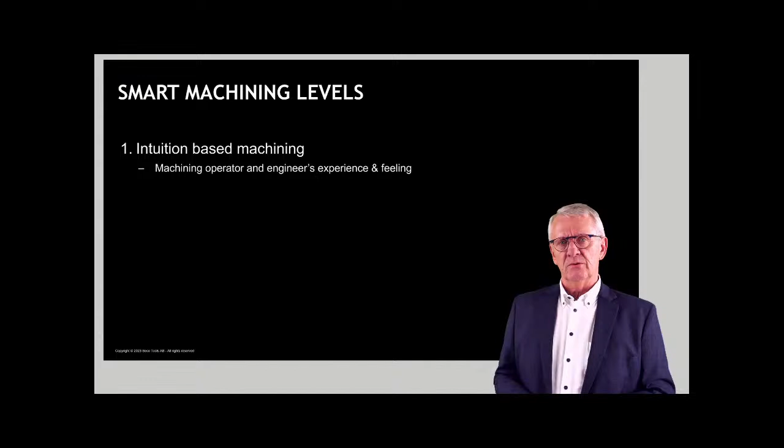To put things in perspective first, if we talk about model-based machining, what do we mean? Let me try to formulate a number of things which are important to understand where we are. If we talk about machining, about the basis on which we select cutting tools, machining methods, cutting conditions, and handle issues and problems - for a long time we talked about what we could call intuition-based machining. Intuition-based machining is where we base our choices, our selections, on intuition, on feeling, on experience, on expertise. It's the traditional way, how we did it for a lot of years. More recently, let's say over the past couple of years, we tried to make a jump, and I think we were rather successful in making a jump towards model-based machining.

Model-based machining is where we use models - and may I remind you that a model is not a theory. A model is a description of something. A model describes reality, hopefully in the best possible way. Model-based machining is where we use physical models that describe machining processes, that give us insight into what's going on, and based on those models we make our selections, our choices. We select cutting tools, cutting conditions, and so on and so forth.

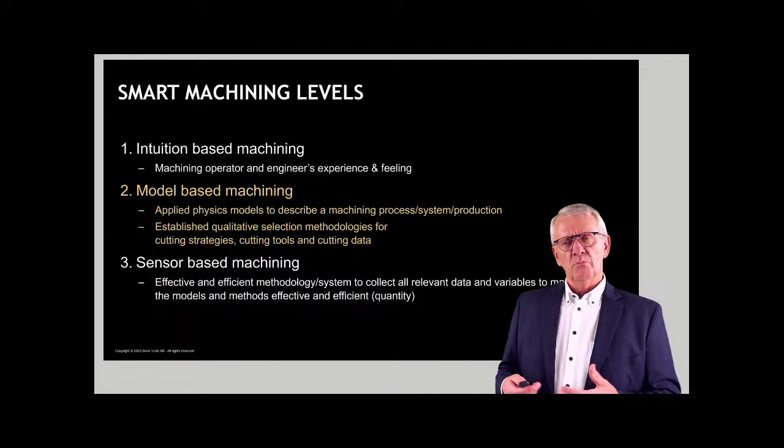That's model-based machining, and I have a feeling that in general, in the world today of machining, that's where we are. On the one hand we still have intuition-based machining. We made a jump towards model-based machining, but to truly and fully exploit all the possibilities of model-based machining, there is a step we need to take, and that I call sensor-based machining. Sensor-based machining is where we collect a big number of data that we can use to fill up the models we have been creating, so that the models can be used in the most effective way. So model-based machining is only really usable when combined with sensor-based machining.

The end is what we all talk about, what everybody is discussing: digital, data-driven machining. One could say, okay, if I take my models and the data I collected through measuring, and put that in a digital environment, then I reach a level of digital data-driven machining.

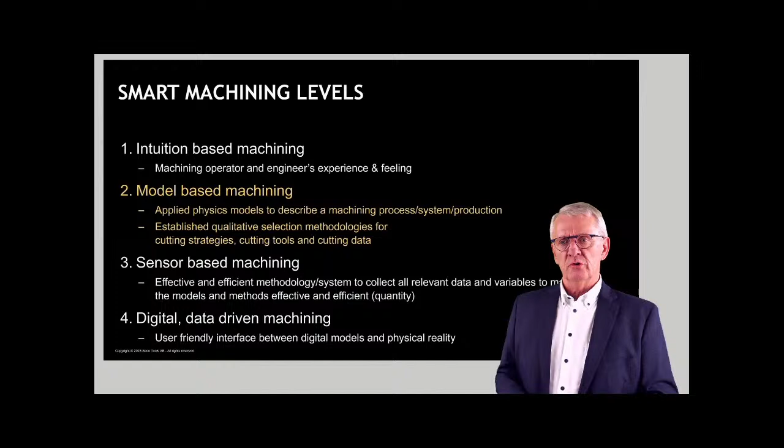Today, we are going to talk about cutting forces, the mechanics of machining, and the models we use in machining for that. And we will see here and there, as we describe the models, that there is a need for sensor-based situations also.

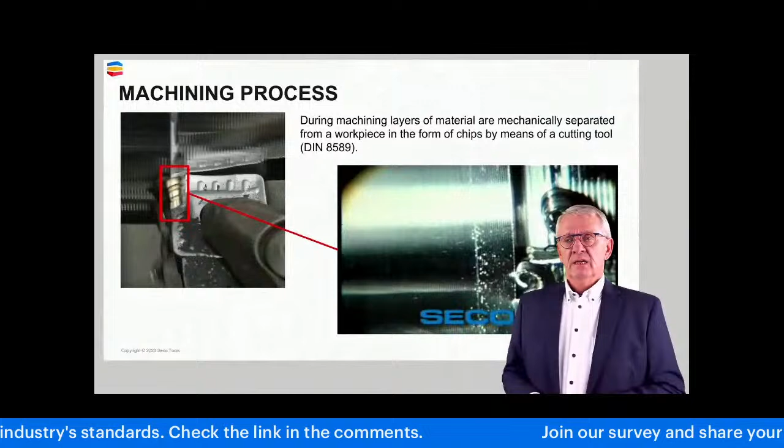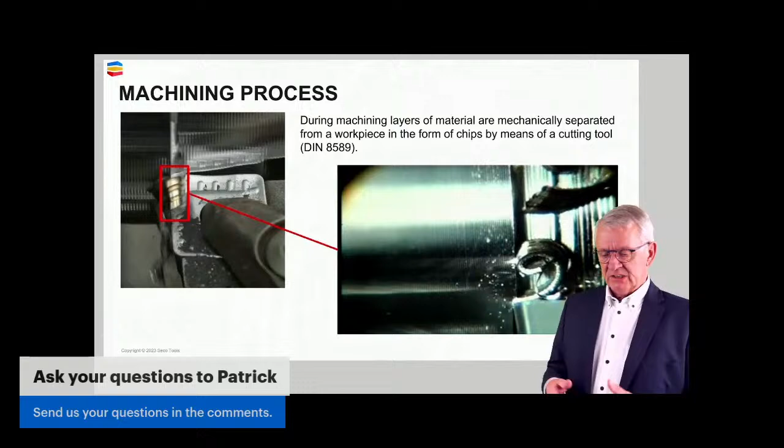Now, model-based machining - the basic model when we talk about machining is a model describing a machining process. Machining is a process where we have a cutting tool that we push through workpiece material, and we deform the workpiece material so much that the material is shorn off, and the shorn off material is evacuated in the form of chips. That's the overall, general, fundamental model we use to describe a machining process.

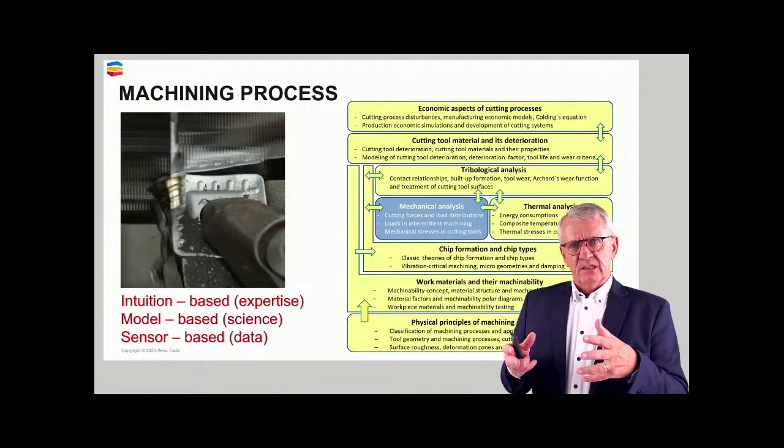Now, if we look at that as a model, there are quite a lot of phenomena we have to take into consideration. There is the mechanical side, the thermal side, the tribological side, and so on, and they all kind of link together in one way or another. But today I want to focus with you on the mechanical side, the mechanics of machining. And if we look at machining, shown in a slightly different way, machining as a process is kind of a balance exercise.

You have on the one hand the cutting tool you use and the support of the cutting tool, meaning the machine tool and so on. That cutting tool has a certain ability to carry loads. On the other hand, the machining process puts the tool in a situation where certain loads are going to act on the cutting tool.

We need to find a balance. We want a well-balanced process so that the load-bearing capacity of the tool and the loads acting on the tool during the process are in balance. Because if there's no balance, there is trouble in paradise. You have to have that balance, both technical and economical.

Today we concentrate mainly on the technical side, and if we want to describe the balance, we need to talk about mechanics again. There are forces acting during this process, thermal effects, tribological effects, chemical effects, and so on. Today, as I already said, we focus on the mechanical part of it.

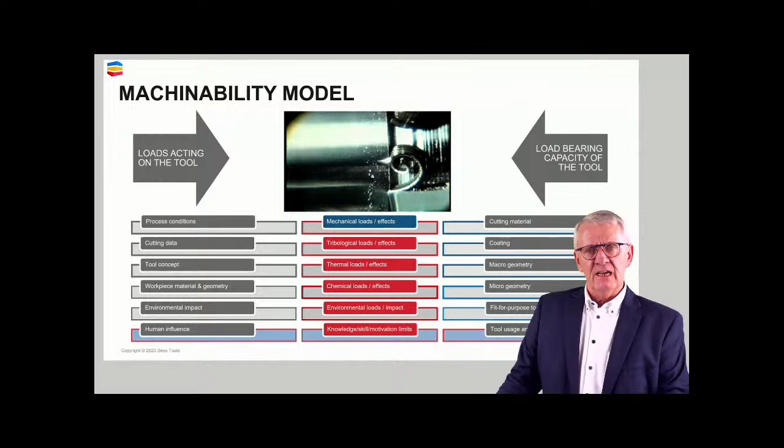If you solve the equation here, taking all the variables that influence the loads acting on a tool and combining that with all the elements that give a tool the possibility to carry load, and you try to solve the equation and bring balance, you want to know if you did a good exercise. You want to control, to see, okay, what I did, is that good now? Did I create what I wanted to create, a well-balanced machining process?

And for that, here I'm going to touch slightly on sensor-based machining, because to find out if you solved the equation right, there are two sources of information for you. One source is the people around the process. People being perhaps the most crucial thing still today in a production shop where we want to reach the highest possible manufacturing excellence levels.

People have a feeling for it. You remember intuition-based machining, they feel things. Was this good? Was this not so good? Was there balance? Was there unbalance? A source for you is to ask people. Ask them, how was it with the process? How did it go? What did you observe?

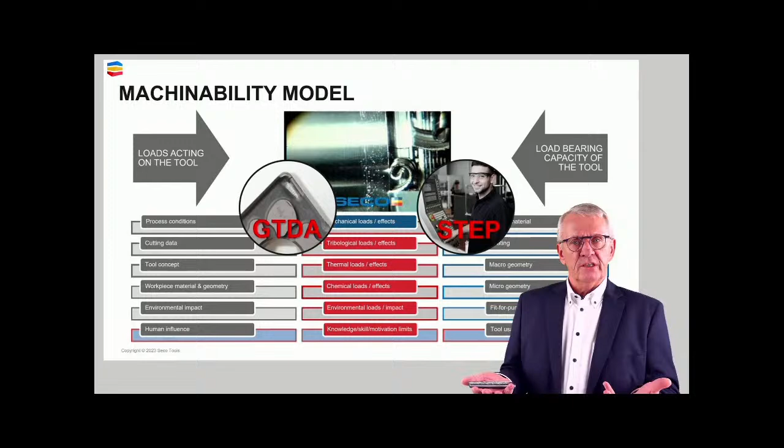Another source of information, a little bit less subjective, because if you ask people it's always a bit subjective, is the tools which have been used in the process. Look at the tools, and what you see on the cutting edges, on the cutting tools, is going to tell you a story - how it was during operation.

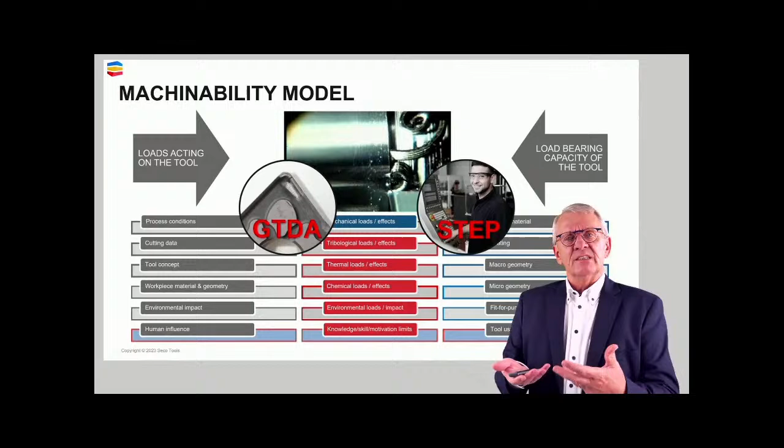If you look at tools in a structured way, there are systems and concepts for that. The one we work quite a lot with is what we call GTDA, Global Tool Deterioration Analysis, where in a standardized way we evaluate tools after they have been used and see what we can learn from it to do better next time.

Now, as we are talking about the mechanics of machining, very quickly a few definitions. What is a force? Here I talk very general mechanics - this has nothing to do with machining in the first place. A force is defined as any influence that can change the position, speed, or state of an object. That's the physical definition of a force.

In case of machining, we want to change the state of a workpiece. We want to deform the material, we want to shear it off. That means we have to apply a cutting force to achieve that.

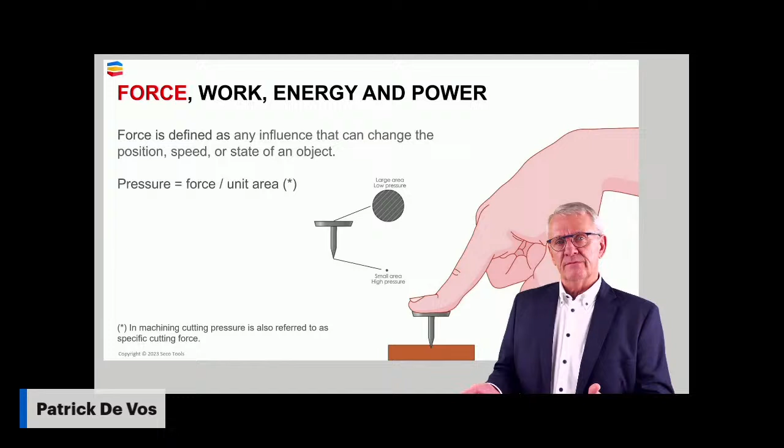When we talk about forces, around the corner is also pressure. Pressure is a force per unit area. It's the same, yet it's not the same - it's connected to each other. But you have a force, and you have a force per unit surface, which is called the pressure.

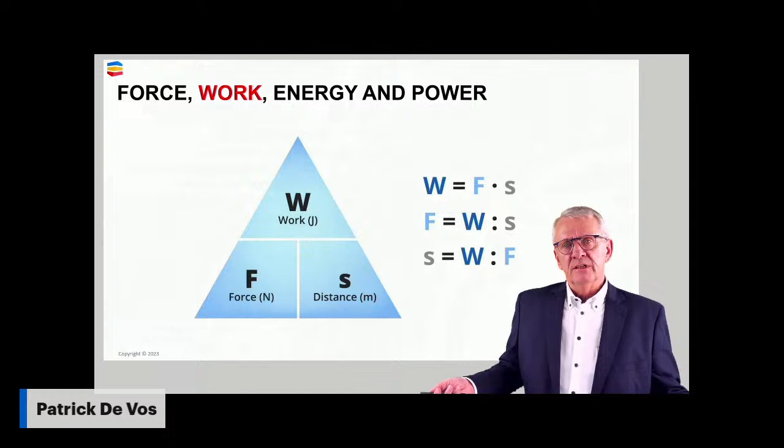Work, another thing we use in mechanics, is force multiplied by distance. If you apply a force on an object and move it over a certain distance, work has been done. That's the definition of work. And to be able to apply a force big enough to move an object over a certain distance, you need energy.

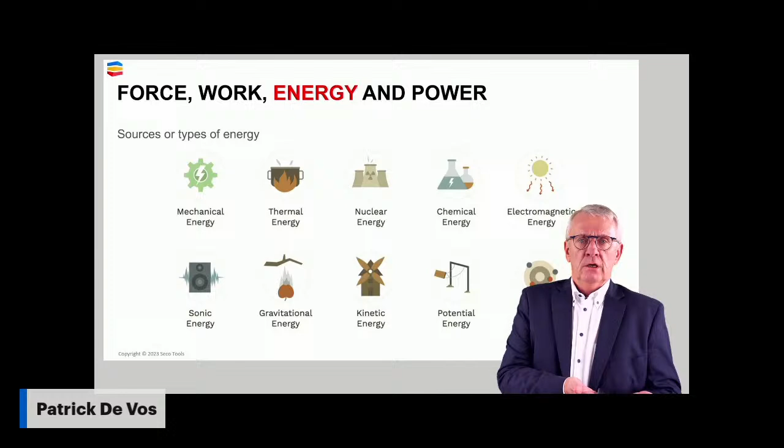The source of energy can be multiple - that's not the discussion point here. But to do machining, we need a force. As the tool is moving through a workpiece, work has been done. And to be able to do work, we need energy. We refer to it as the cutting energy, the energy needed to cut.

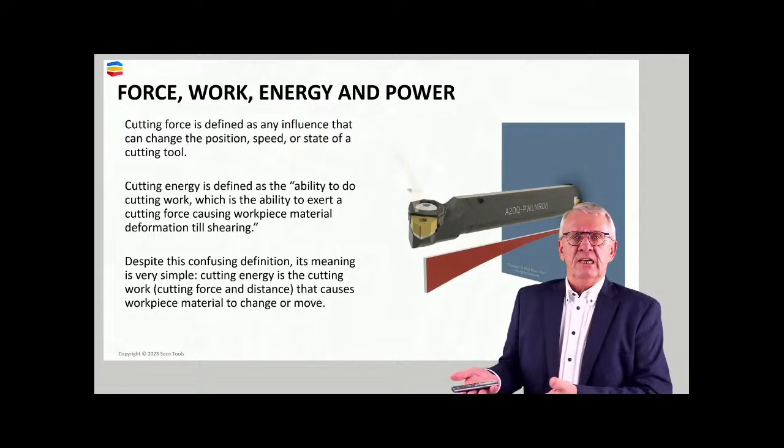So a cutting force - before, the words force, work, energy, power, which is work per time unit, were general. If you put 'cutting' in front, you are fully into metal cutting. You have a cutting force, cutting work, cutting energy, and cutting power.

Bear in mind that in the mechanical world, we always have action and reaction. The tool is going to put a force on a workpiece to deform the workpiece material, but the workpiece is going to push back. You have action and reaction. Never forget that. Later on, when we talk about vibrations, for instance, it's important to realize that a tool is vibrating because a workpiece is pushing back to the tool.

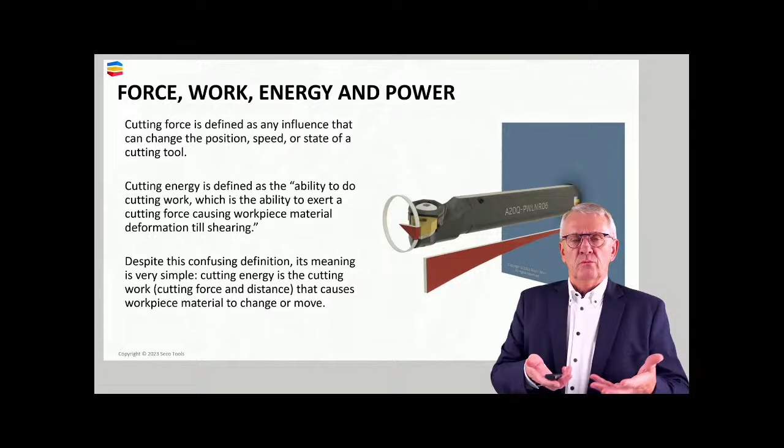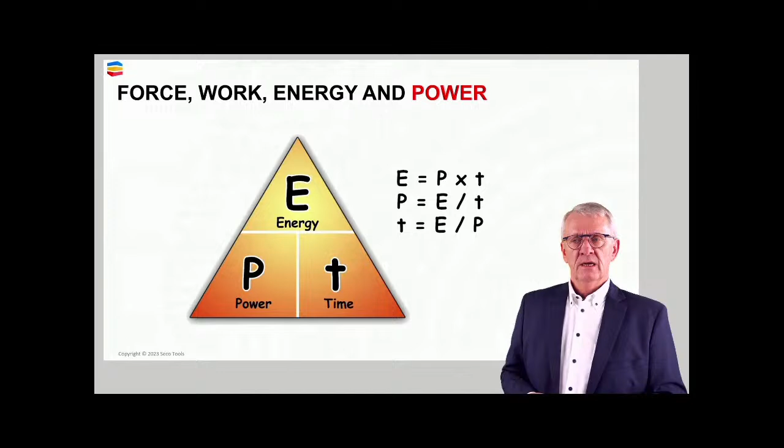Power, as I already said, is energy per time unit. It's kind of concentrated energy. Those are the basic definitions we are going to use throughout this presentation: force, work, energy, power.

That tool is moving through workpiece material, deforming the material in a so-called shear plane. And to overcome the strength of the material, in that shear plane acts a shear force. The deformed material, under the form of a chip, is gliding over the cutting tool, over the rake face. There is going to be a friction force there. And based on those two forces, the shear force and the friction force, Ernst and Merchant developed a whole way of thinking on how cutting forces develop during machining.

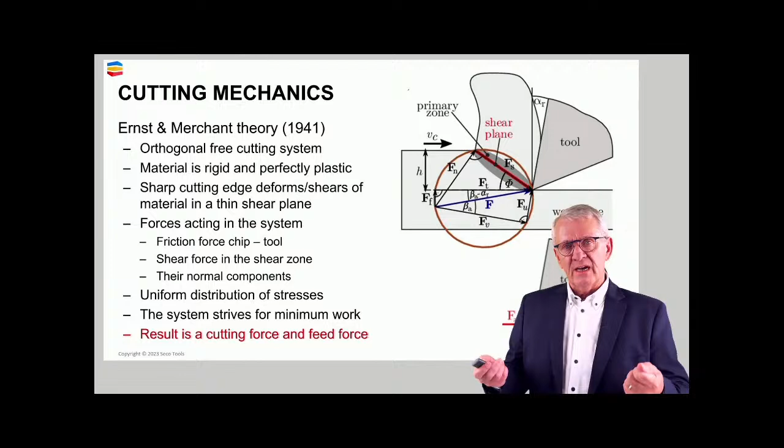So I have a cutting tool. To make it cut, I need to apply a cutting force and a feed force. And that kind of macro modeling, which we still use today, is based on Ernst and Merchant, and be careful, also based on so-called oblique cutting.

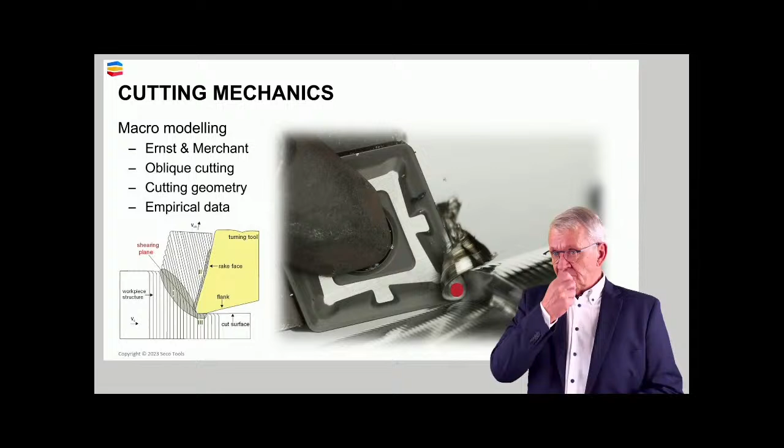Oblique cutting is a situation where a cutting edge is perpendicular to the feed direction. So we have to bear in mind later on, if we talk about these things, the macro modeling also somehow has to take into consideration a certain cutting geometry we use.

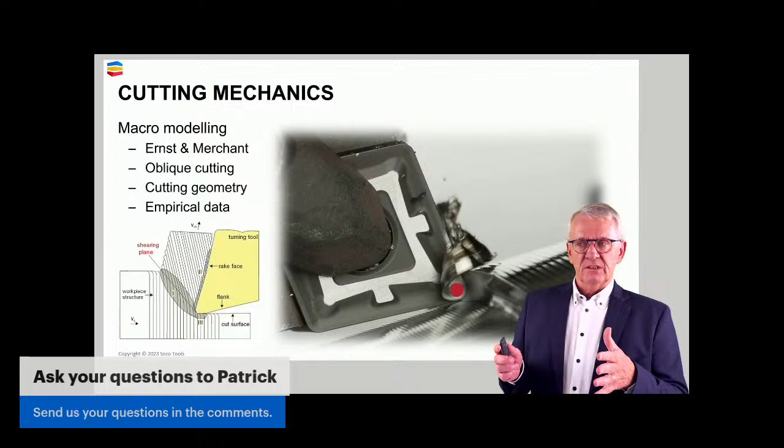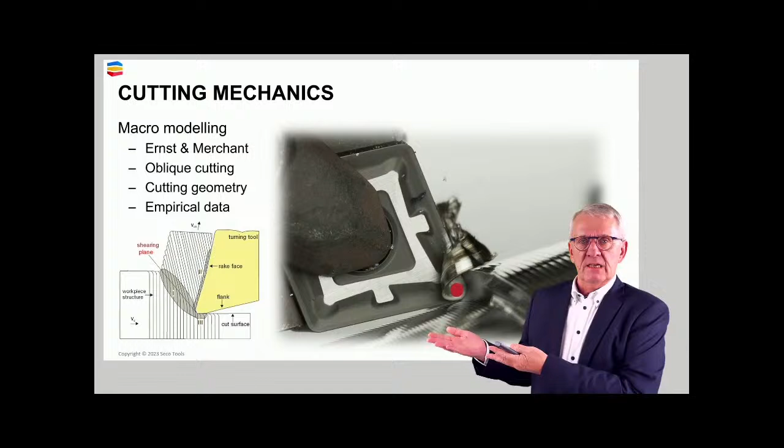And, very important, most of the things we say further about this way of working, this model we are going to try to develop together, is based on empirical data. In other words, what I called a couple of minutes ago, sensor-based machining—machining based on data. And that's an interesting thing, because it means the models were created based on data, and once we have the models, we need more data to make the models better, which makes a very nice closed loop to this.

Ernst and Merchant said there is a feed force and a cutting force, perpendicular to each other. The feed force is acting in the direction of the feed movement of the tool, while the cutting force is acting in the cutting direction of the tool.

What we see in reality is, because real cutting is not really only oblique cutting, but we also use cutting where the cutting edge angles are not 90 degrees, that there is kind of a reactive force which we refer to as the passive force, the passive component. Why do we call it passive? Well, very simple—because there is normally no movement in that direction, and as there is no movement, there is no work and there is no energy needed for that force.

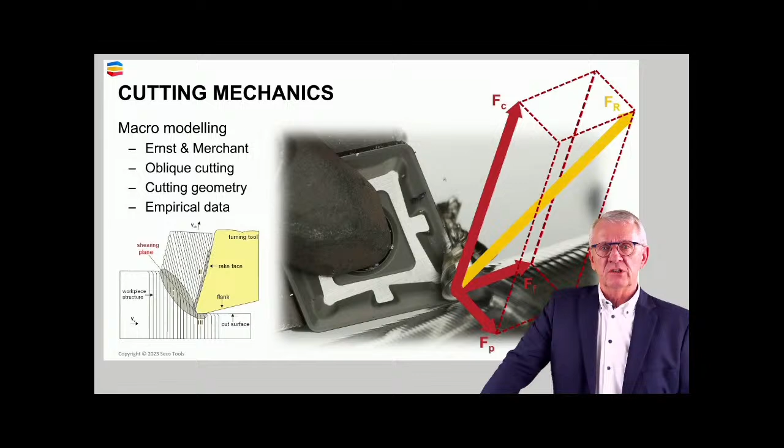But there is something else I'm going to come back to later on for that cutting force. The real cutting force, the physical cutting force working during machining, is the yellow one. It's the three components added together, and that gives us the real cutting force—the cutting force we would measure if we measured actual cutting forces in reality.

Now, that cutting force is influenced by workpiece materials, as we're going to see directly, and is influenced by the cutting geometry. The workpiece materials—I think you can understand that. It's about: the harder the workpiece material, the more difficult to deform. And I want to deform it, because that's machining. So harder workpiece materials demand higher cutting forces to be machined.

The cutting geometry: sharper tools cut easier than less sharp tools. And cutting data and conditions, obviously—if you increase your cutting data, you need to push harder against more workpiece material, for instance because you increase your depth of cut, to do actual machining.

Cutting forces, that they exist, and remember, as the picture shows, it's always action and reaction. For me, it's the same what you take as a basis - is it a cutting tool pushing against a workpiece, or is it a workpiece pushing back against a cutting tool? Whatever, the two are there.

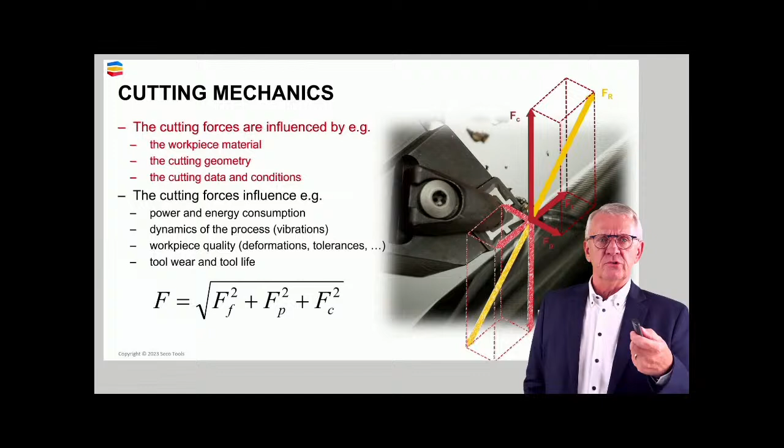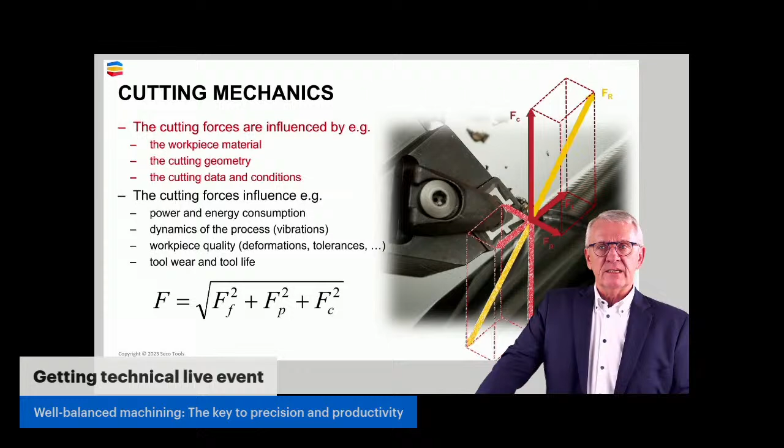Later on, we are going to see - first I want to determine what the variables are and how they impact on a cutting force, the red part here. Later we are going to focus on what is still the black text: what are the consequences of the existence of cutting forces? What do we have to bear in mind?

Now, if we talk about cutting forces, we have to be a little bit careful when we refer to cutting data. Because cutting data - automatically people will say, yeah, cutting data, of course there's the depth of cut, the feed and the cutting speed.

Those we normally refer to as the technical cutting data. It's the cutting data which are used in the workshop, which are used by programmers. A tool needs to be used with a feed, a depth of cut and a cutting speed. Those things are relevant for the workpiece.

Technological cutting data, however, which are slightly different defined, are relevant for the functioning of the cutting edge. Physical cutting data are very closely related to technological cutting data, but the difference is the scale on which you look at things. Physical cutting data are relevant for the physics of the machining process, but for the sake of simplicity here, technological and physical cutting data we consider the same thing.

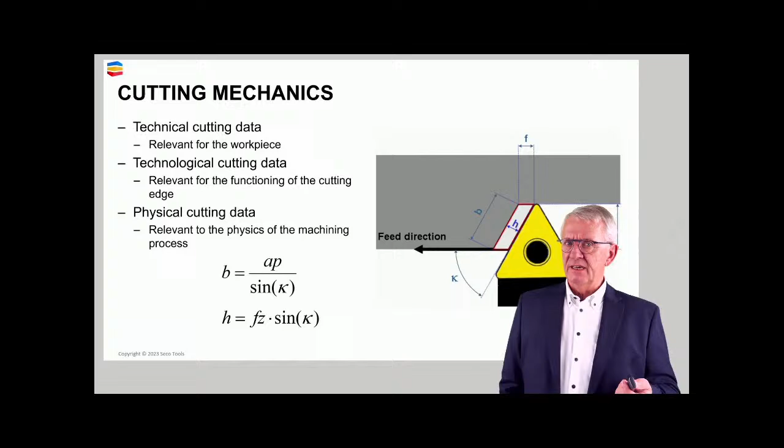The model we are developing here refers to, or is originally made up for, width of cut and chip thickness. So there we have to be a little bit careful when we apply it.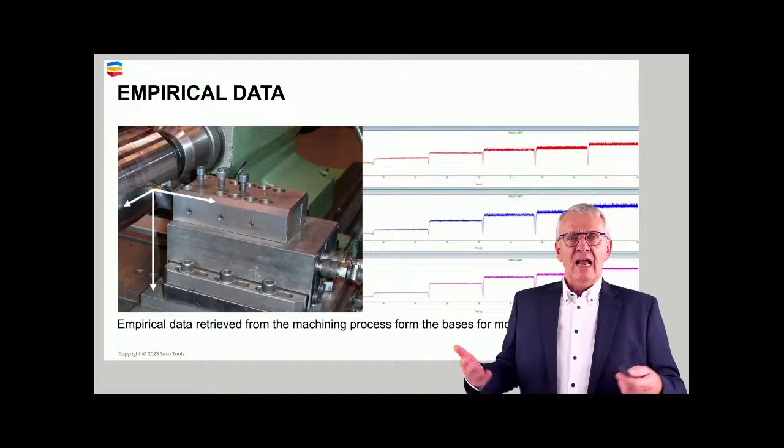The model is based on, as I already said, empirical data. We measure and we see what we observe. And measuring, what I mean is, we take a cutting process, we take a measuring tool to measure cutting forces, in this case cutting forces, and we measure the three components. And we start to play with variables - different materials, different feeds, different depth of cut, different tools - and we document what we measure. That's the basis.

And the first gentleman who did that in a structured way was a certain Mr. Kienzle in Germany. I'm talking about the beginning of the 50s of the previous century. And he measured hundreds, thousands, tens of thousands of situations, always measuring cutting forces. He started a little bit of big data analysis avant la lettre in the 50s already.

He looked at the data and tried to find out, what do I see? Do I see something in all this data? And he did - he saw that for a certain tool... sorry for this, but I have a big cold, you know.

For a certain tool in a certain workpiece material, if he started to play with cutting conditions and measured the three cutting forces, what he noticed was the diagram up right here. If he increased the depth of cut while keeping cutting speed and feed constant, he noticed a relation between depth of cut and cutting forces that is rather simple and linear. If he increases depth of cut, the cutting forces increase in the same relation, in case of steel, since that was his basic test material.

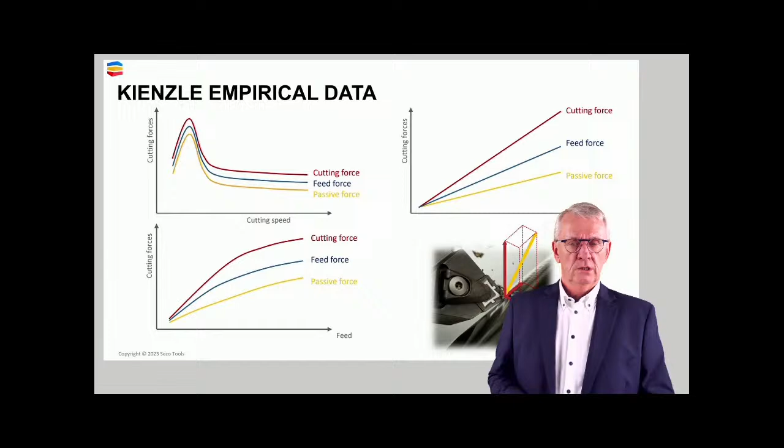If your cutting speed is too low, you have a very specific phenomenon during machining which we refer to as build-up edge, due to adhesion between workpiece material and cutting material. If due to that adhesion a build-up edge is formed, some of the workpiece material sticks on the cutting edge, and one consequence of that is that your cutting forces go up. If, however, you increase your cutting speed, that phenomenon disappears and your cutting forces go down to normal levels. So this bulb is an indication that you're using cutting speeds that are too low. That's all there is to this story.

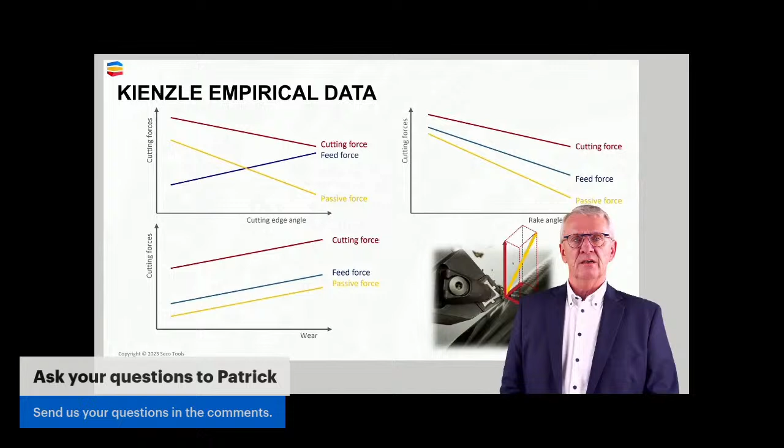Further, as I said, Kienzle did tens of thousands of tests. He also evaluated the effect of geometries, shown in the two top graphs. To the left is the cutting edge angle, to the right is the rake angle. Basically, these diagrams tell us the sharper the tool, the lower the cutting forces, which makes sense.

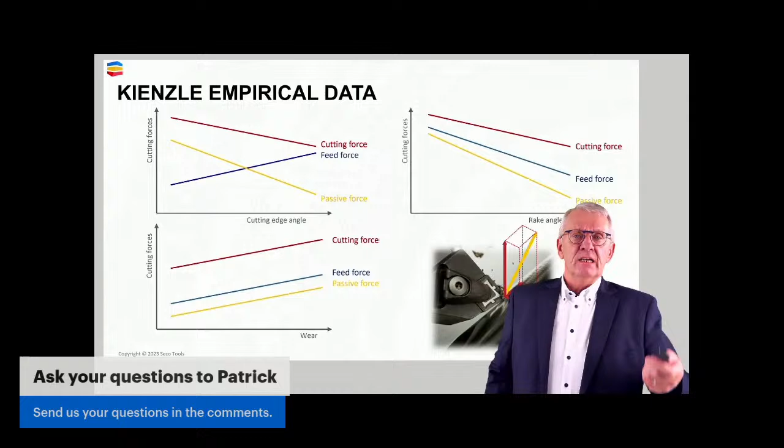He also, of course, looked into the influence of wear on a cutting tool, because after a while a cutting tool wears out, and certain wear patterns develop on the cutting edge that change the geometry of the tool, and that has consequences. In general, the picture is that as wear increases, cutting forces go up. As the wear increases, the tool loses its original geometry, the geometry for which it was designed, and that impacts how the tool functions in a negative manner. The cutting forces go up.

Basically, what Kienzle concluded was that if you have a tool and a workpiece material, the highest impact, besides working conditions like wear and so on, comes from cutting data, mainly the feed and the depth of cut, as you see unified here in one diagram.

And the impact of the depth of cut, horizontally considered depth of cut. If you look to the blue line, that is the relation between depth of cut and cutting force, and you see it's a linear relation. Every change you make in depth of cut, you find back in cutting force changes.

The red line represents the impact of the feed, and there you see that the impact is lower. The bigger the feed, the bigger the difference gets between impact from depth of cut and impact from feed.

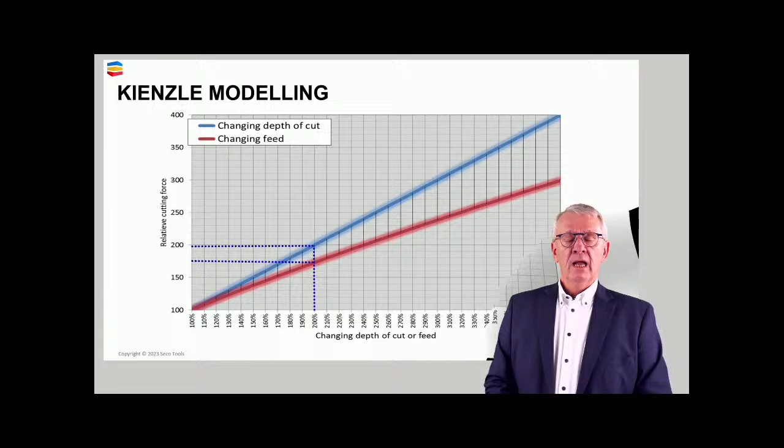Of course, those were the observations. Kienzle spent quite some time formulating this in a certain manner so we could work with it, which led to formulas, mathematics, calculus, where Kienzle says, depending on if you focus on the cutting force or the feed force or whatever, that the certain force component is influenced by the cutting conditions: width of cut, depth of cut,

and chip thickness, feed. To some extent, you have to take into consideration the geometry, and you have the material impact. The material impact is represented here by the K11 values: KC11, KF11, and KP11, which refer to cutting force component, feed force component, and passive force component. Here there is some confusion: some call it a specific cutting force, others call it a specific cutting pressure, as it is a pressure, one could say.

1,1 would be the cutting force you measure if the depth of cut is 1 millimeter and the feed is 1 millimeter. That's KC11. It's a material constant. Every material has a certain density, a certain specific cutting force, a certain strength, a certain hardness, and so on.

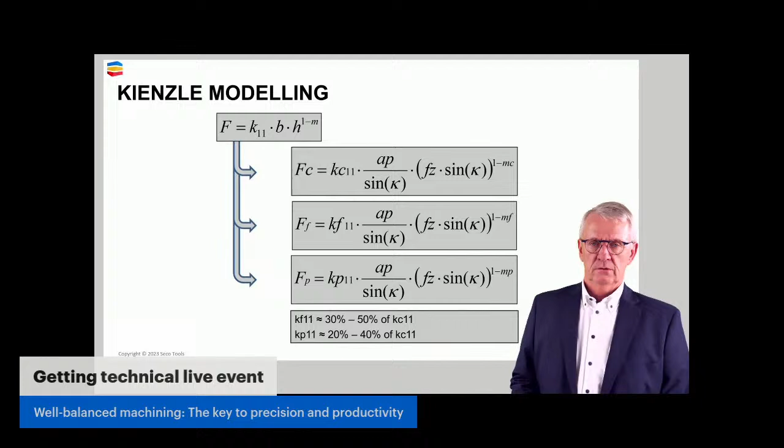That's the material impact. The 1 minus mc is the exponent, which is a mathematical way of saying that the impact of the feed, or the relation between the feed and the cutting force, is nonlinear. Those are the mathematics related to this process.

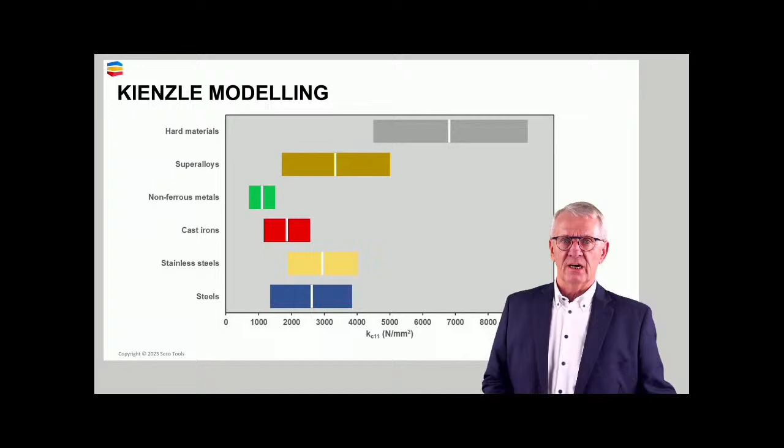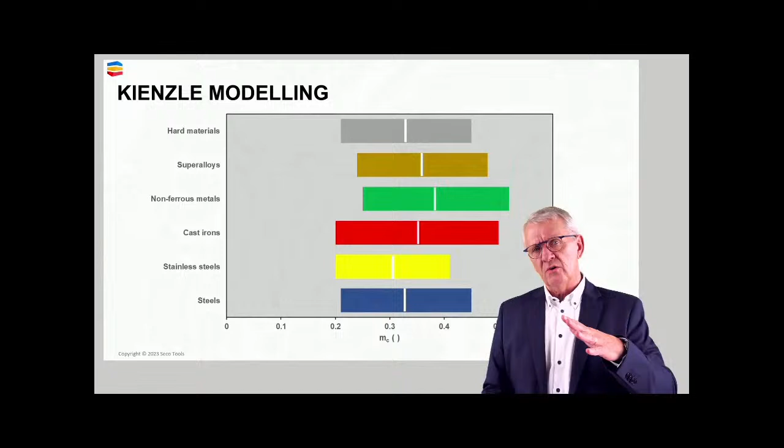MC - to which extent is the relation linear, or is approaching linear, or is going away from linear? The more the MC goes towards higher values, the lesser linearity you see in the relation. The lower, the more linearity you see in the relation.

Here again you have the 6 typical workpiece materials, and you see the differences are not so big, but be careful, because these are exponents and could lead to quite big differences when you start to put values in the equation.

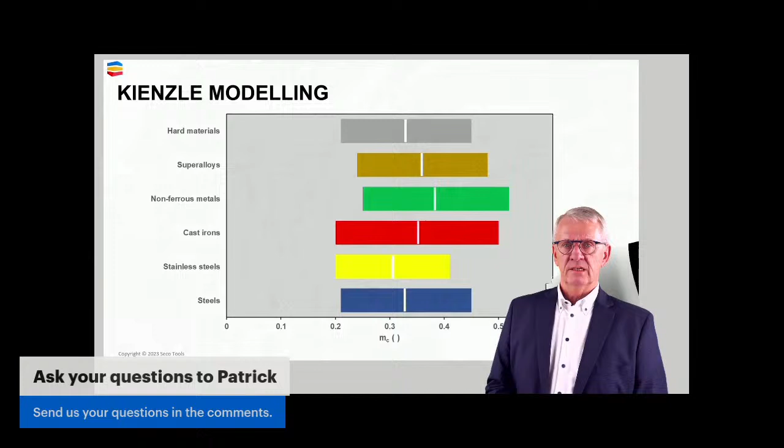What it means is, and hopefully this diagram shows it a little bit better - again you see the colors: green non-ferro, red cast iron, blue and yellow stainless steels, and orange-brown the superalloys. What you see is that if you measure

cutting forces with different chip thicknesses, call it feed to keep it simple here, the impact of feed on cutting forces in case of superalloys is bigger than what you would see in case of steel or stainless steel. The non-linearity of the relation in case of superalloys is more explicit than what you see in case of steel machining.

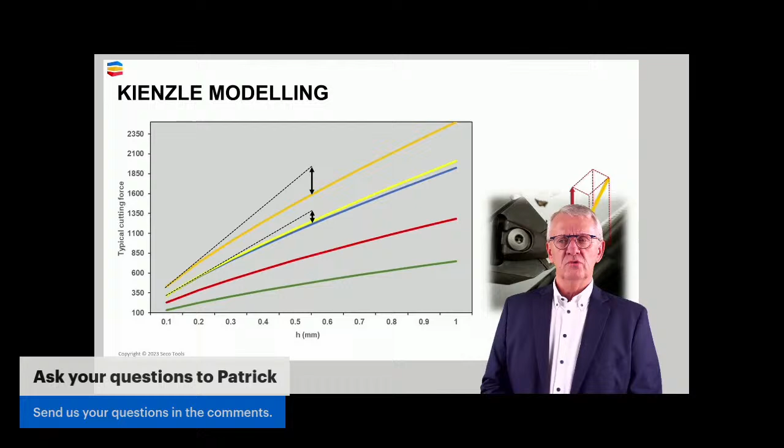And that's something to remember, because there are big problems with that if people are not aware of that phenomenon.

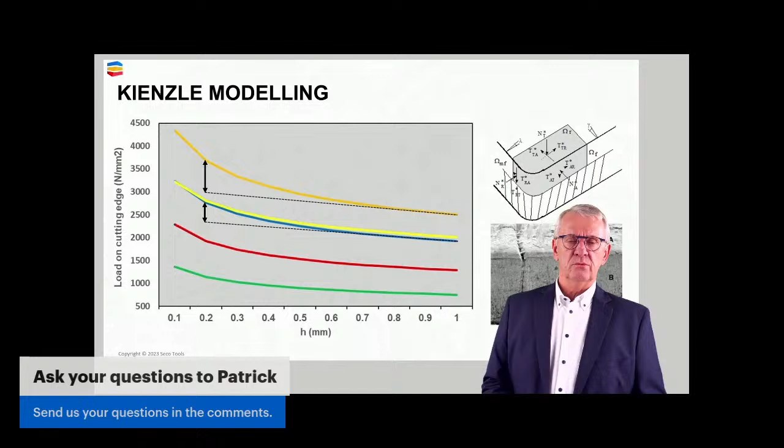Another way of showing is here, where you see the loads, the pressures, rather than forces as before. You see the same phenomenon that in superalloys, as an example, if you go towards smaller chip thicknesses, smaller feeds, the load increases quite a lot, a lot more than what we see normally in steel machining, which is the basic explanation why in superalloys cutting edges are so sensitive to cracking and chipping.

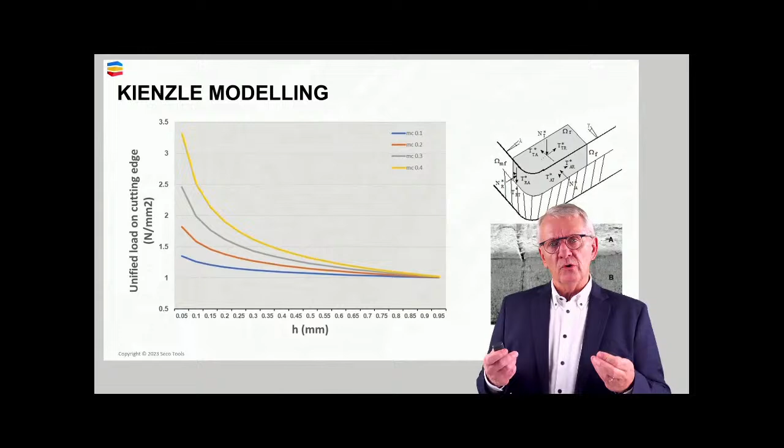Yet another way of showing it, I try to show the same thing three times here to let you feel that playing with feeds when we talk about the mechanics of a machining process is an important thing. It's not so much the cutting speeds we focus on, it's the feeds which are important.

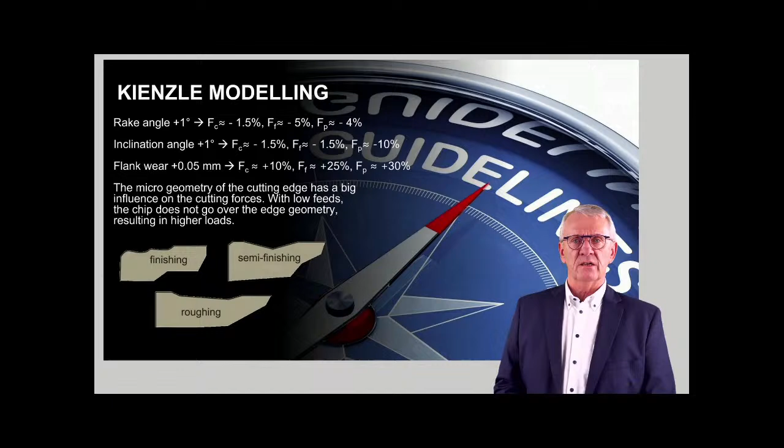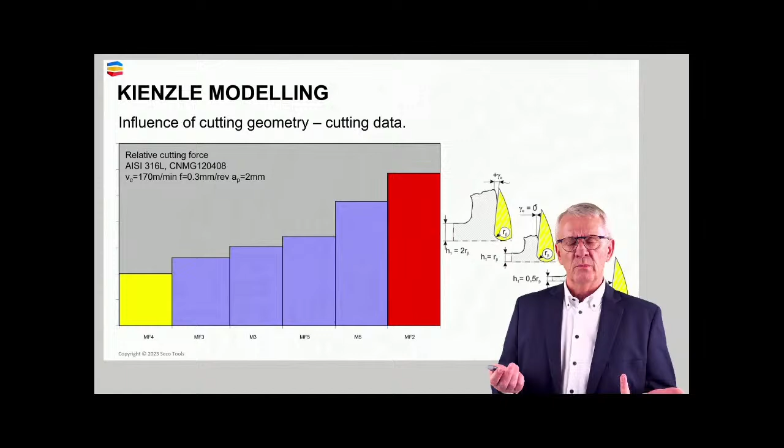The geometry plays, of course, a role. What Kienzle measured, and what we still measure today if we do the experiments, is that there are certain general relations which most of the time we bring into consideration as correction factors. Here you see a typical example where we have one situation, one material, one set of cutting conditions. We work with different geometries, and you see that cutting forces are different as geometries are different.

Quite logical, I think. Next to the size, there is a direction. Cutting forces act in certain directions, which are influenced by how the cutting edge is directed or positioned compared to the cutting direction, the cutting movement, and the feed direction, the feed movement. What is important there is positioning of the cutting edge line, the cutting point, and how the cutting point relates to the cutting conditions.

Something we have to remember - this was a subject at the previous session, we talked about the dynamics of cutting forces. We think cutting forces are a stable thing. As a matter of fact, they are not, they are changing all the time. Here you see it measured and simulated at the same time, that cutting forces are not a constant value, but there is a dynamic effect. Cutting forces, during machining, go up and down.

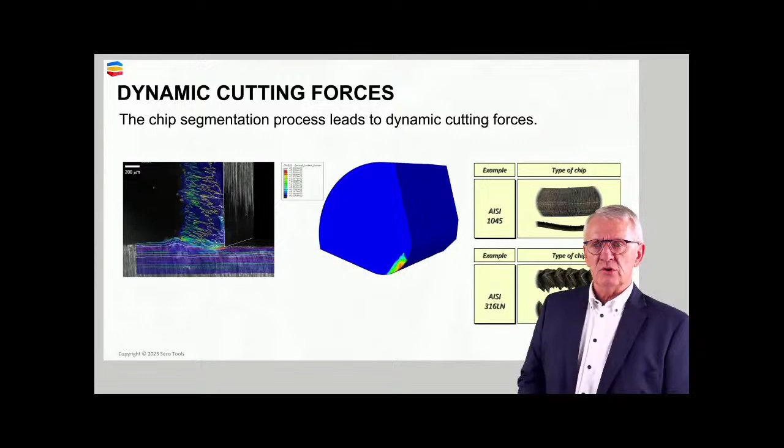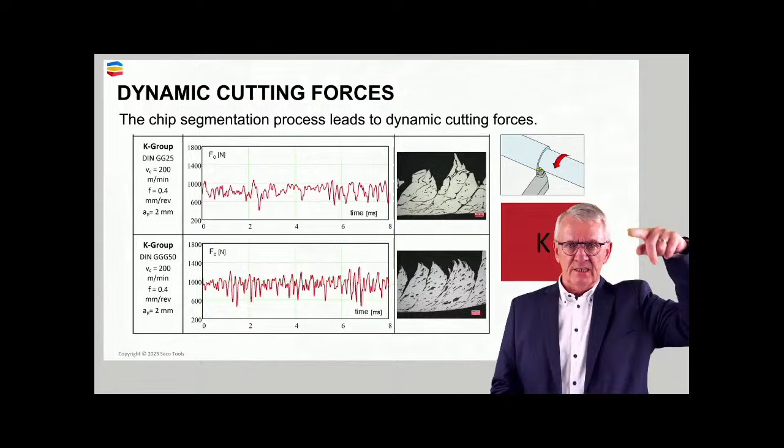There's a certain variation. That variation in smooth cutting materials, think of traditional steel, is not so big, but if you move to materials that behave in a more irregular way when it comes to deformation, shearing and so on, you see that measured cutting forces are not a flat line anymore, but the line starts to be curved, going up and down.

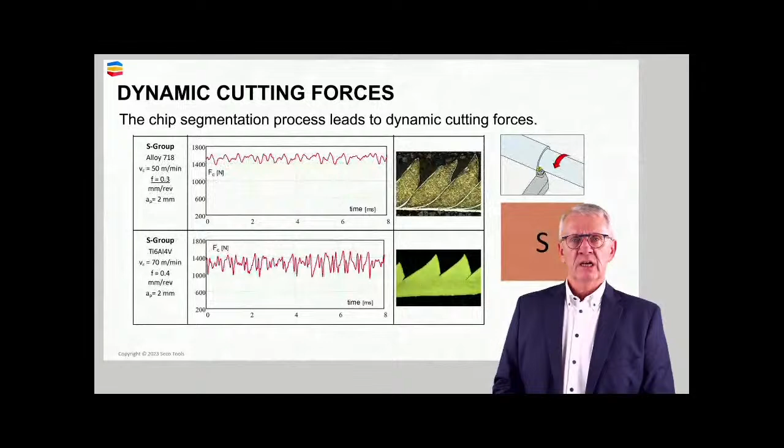You see here different types of materials - cast iron, stainless steels, superalloys, titanium alloys. You see that materials differ in dynamics during machining. And here you have an idea about variation factors for different types of materials, just as information.

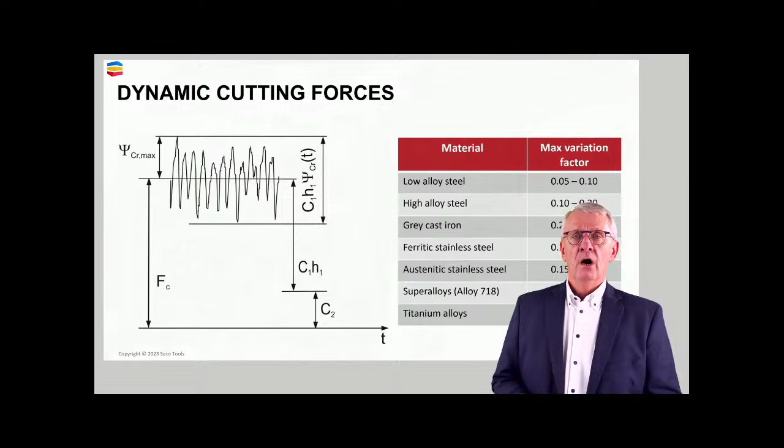Bigger variation factors, what does it mean for us physically? Well, bigger variation factors mean that from a wear perspective, we have to be more aware of phenomena of fatigue, both thermal fatigue and mechanical fatigue. That will lead to very specific wear patterns that in a lot of cases are unfavorable for us, but are very difficult to avoid due to this variation factor. Or we have to try to find solutions to minimize variation.

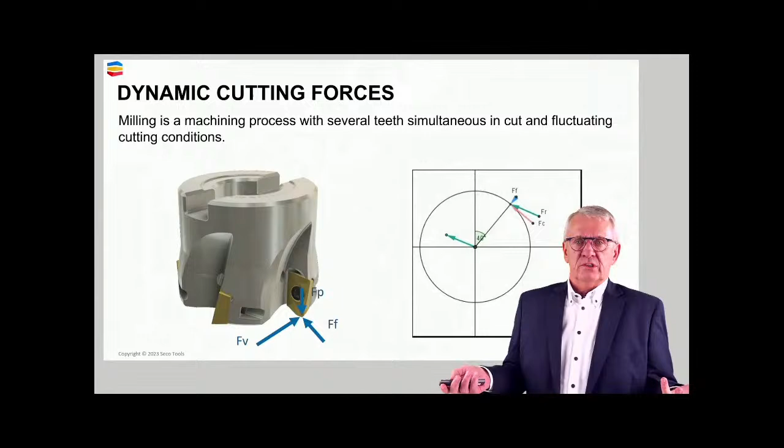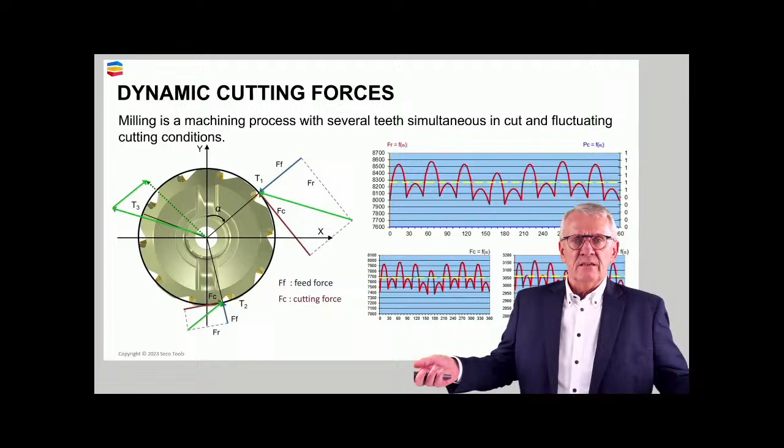One application where the variations are very big is milling. Milling is a situation where cutting edges are not static, but the milling cutter is turning around. That means that cutting conditions at certain points in time are different, and cutting forces are also different, meaning that if you measure it really in detail, you see here examples of cutting forces, how during milling cutting forces are very dynamic, going up and down.

That is the basics of the model. Now, if we apply it, what does it mean? Power and energy consumption - you remember power is energy per time unit, and energy is cutting force times the travel distance, which is the thing we need to make the cutting tool work. It's mechanics.

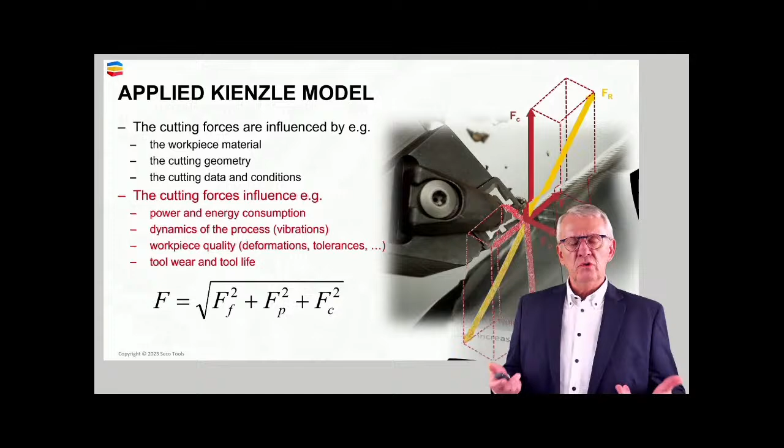Power, energy consumption, dynamics of the process, vibrations, workpiece quality, because you have action and reaction. The tool will potentially deform the workpiece, put it out of tolerance, and so on. Tool wear - all of those things are influenced by cutting forces.

Cutting energy - you see here an intriguing thing. On the horizontal axis, every point is a combination of feed and depth of cut, but it's a combination that gives you the same metal removal rate. In other words, the same machining productivity.

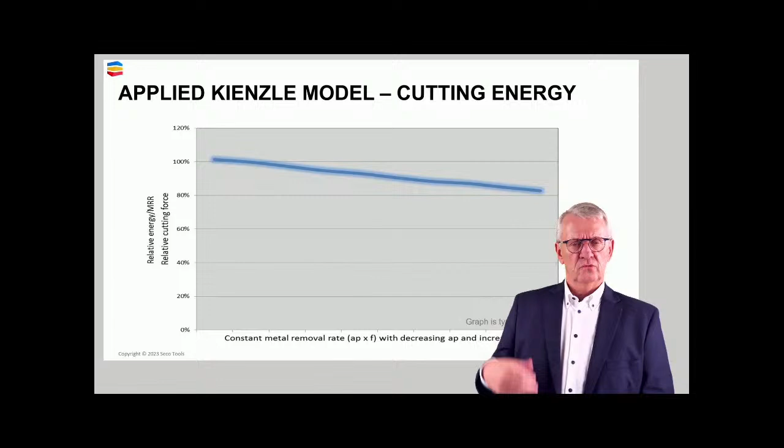Yet if you look at different points on that horizontal axis, every point corresponds with a different energy needed to do the operation. On the left, you see a certain combination of big depth of cut and small feed. On the right, you see big feed and small depth of cut, but the relation is such that there is balance, the same productivity, and here you see energy consumption. Big feed combined with small depth of cut consumes less unified specific energy than the opposite. An interesting thought to take into consideration.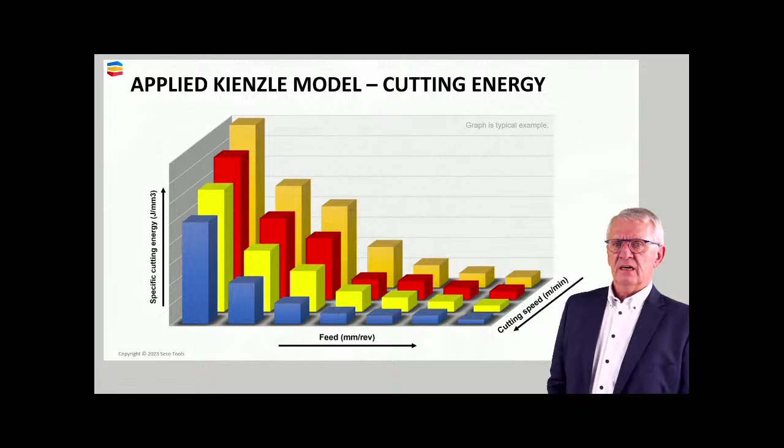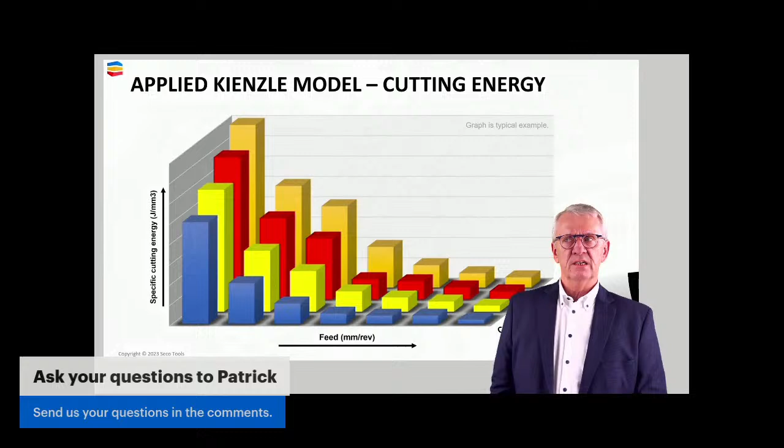Here you see the same thing shown in a different way, a relation between feed, cutting speed, and specific energy. If you take feed and cutting speed and start playing with it, you see very clearly that high feeds and high cutting speeds give you low specific cutting energy, while small feeds and small cutting speeds give you big specific energy, joules per cubic millimeter. Also an intriguing thing to stand with.

Shown in a two-dimensional graph, this says that if you work with a small metal removal rate, the situation to the left is finishing, the situation to the right is roughing, and the vertical axis gives you specific energy. This diagram teaches us, based on observations and some calculus, that finishing demands higher specific energy than roughing. How about that as a consideration if you talk about energy-efficient machining?

The background here, because people say, how is that possible, I don't understand that. Well, the background is something people forget: energy consumption isn't just the machining process, there are quite a lot more elements that consume energy during machining. But if you add everything up, situation by situation, you end up in the diagram you see here to the left.

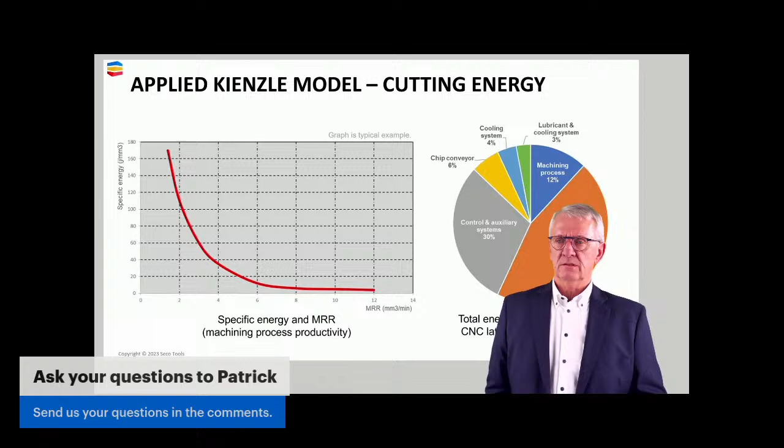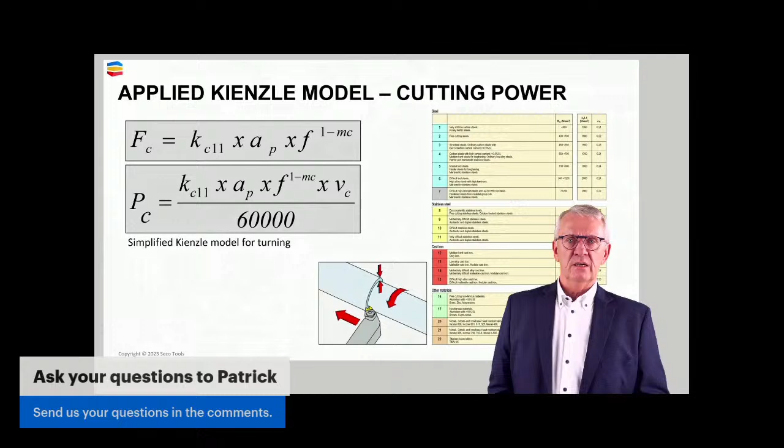Cutting power. I think people worry daily about cutting power. Do I have enough power? Will this work? But if you understand mechanics, if you know cutting forces, calculating the power you need to do an operation doesn't need to take more than two minutes, or at least to have an idea about what you're talking about.

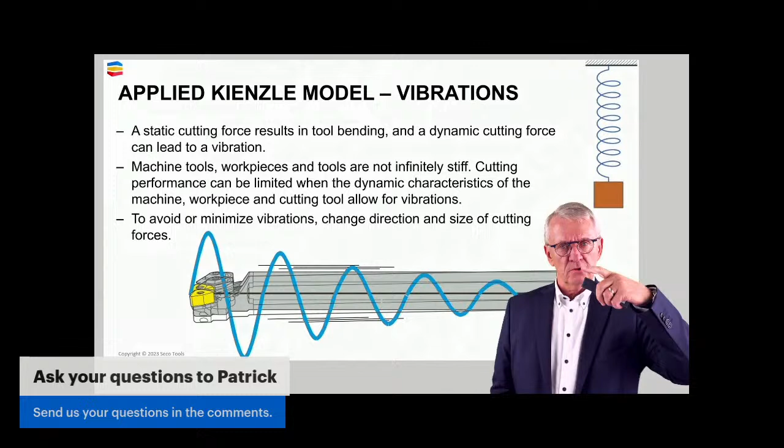Vibrations is mechanics. If you push on a tool, if the cutting force goes up and down, and remember the dynamic nature of cutting forces, there is a risk that you make the tool vibrate.

Cutting forces: the tool pushes against the workpiece, the workpiece pushes back. That means cutting forces will move the tool or move the workpiece. Tool movement could lead to a certain vibration. Now, the workpiece moving means you can start to have issues with shape of workpieces, dimensions of workpieces, and so on.

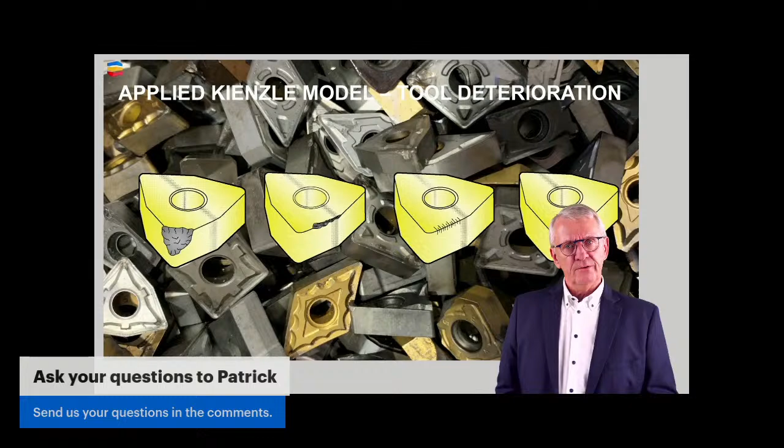A big number of the wear patterns we are confronted with are based on mechanical things, cutting forces. Understand cutting forces, the physics of cutting forces during machining, and quite a lot of the wear patterns you see appearing on cutting edges - if you don't like what you see, taking them away from a cutting edge is quite simple. It's mechanical thinking.

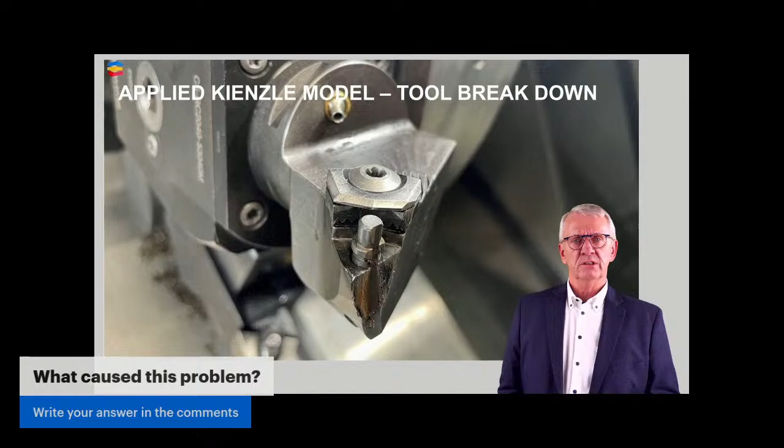Summary and conclusions. Cutting forces. Machining is about understanding the mechanics of the process, thermal effects, tribological effects. Today we talked about the mechanics, the cutting forces.

It's a mechanical exercise. As I told you, if you want to know if you did the exercise well, if your insight was good, if your mathematics were good, check with people. People will tell you if there were vibrations, yes or no. Of course, people need to be capable of recognizing a problem as a problem. That's why well-educated people is important in this context, of course.

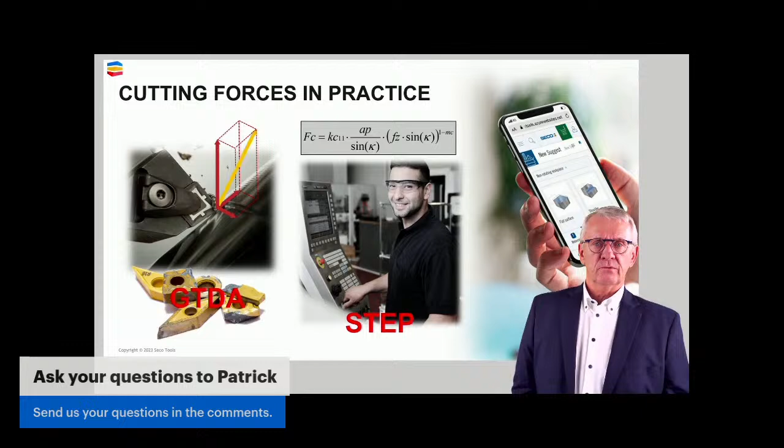And look at the tools. Tools will tell you a lot of things if you look at them. And there we have standardized approaches like what I refer to, for instance, GTDA. Well-balanced machining: machining is about having balance. Today we talked about the mechanical balance.

The model we use today is a macro model and it still gives very good results. It's referred to as the Kienzle model. It's based on empirical data, but to make it work, again, you need empirical data. Next to model-based machining, sensor-based machining has to support this. I need values for Kc11, values for mc, variation factors and so on. All that data needs to be available if I want to calculate with this.

Are they the key to precision? Yes. Because if you have problems with quality, shape of a workpiece, positioning, dimensions, it's because the workpiece deformed during machining too much. Why is a workpiece deforming? Because your cutting forces were out of what was allowed. You have to reduce them or change the direction in which they work. So if you have that under control, you have your key to precision.

Productivity can be measured through OEE. You know OEE, and in OEE a big loss is the so-called minor stops. Why do we have minor stops? Because there are vibrations we need to solve, because there's a tool breakdown, because the cutting edges break, because workpieces vibrate. All of those things lead to unexpected standstill, minor stops. It's major stops too, but anyway, minor stops in OEE terminology find their origin in the mechanics of the process. So if you have those under control, automatically you reduce your minor stops, and automatically you increase your OEE, you increase your productivity.